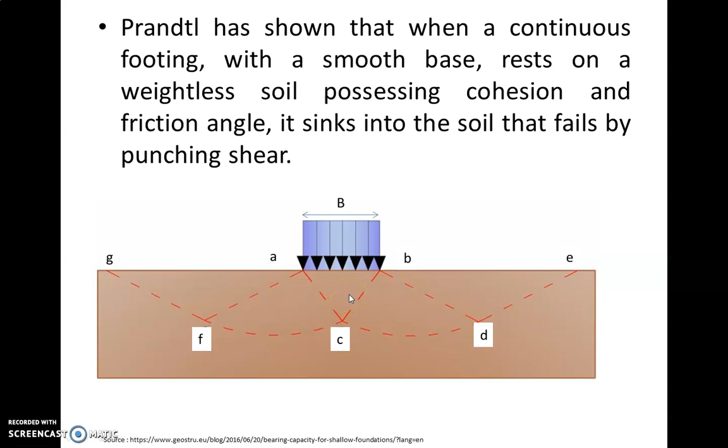Prandtl in 1920 proposed his theory of bearing capacity based on his study of penetration or punching of long hard metal punches into a softer material. He observed that the hard metal punched into the softer material, and the same theory he used in order to define the theory of bearing capacity.

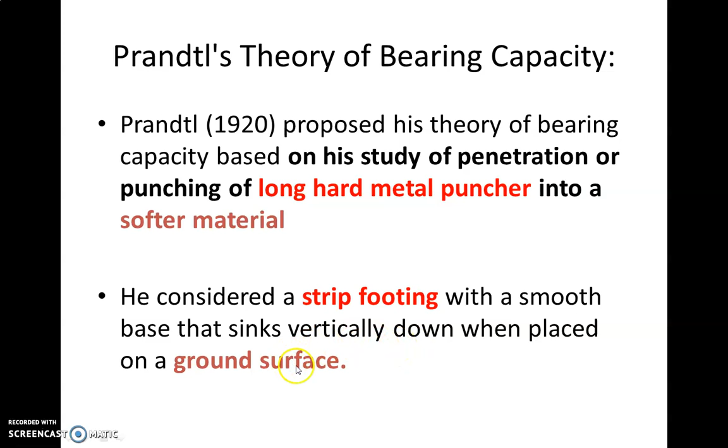So here the hard metal punch is referred to as stiff footing and the softer material is referred to as ground surface. So when the stiff footing with the smooth base rests on the soil, it would sink vertically in downward direction when placed on ground surface.

There are certain assumptions made by Prandtl. Those are: the material is softer, homogeneous and isotropic. That means the soil is referred to as soft and it is homogeneous as well as isotropic. The material is weightless, that means its weight is equal to 0. As weight is equal to 0, unit weight gamma will also be equal to 0, as gamma is equal to weight by volume. So if W is equal to 0, gamma will also be equal to 0.

But the soil is referred to as the C-phi soil, that means it would have cohesion and friction. The problem is two-dimensional, that means two directions would be considered, maybe X and Y directions. The base of the punch is smooth, that is the base of the footing is considered to be smooth, not rough.

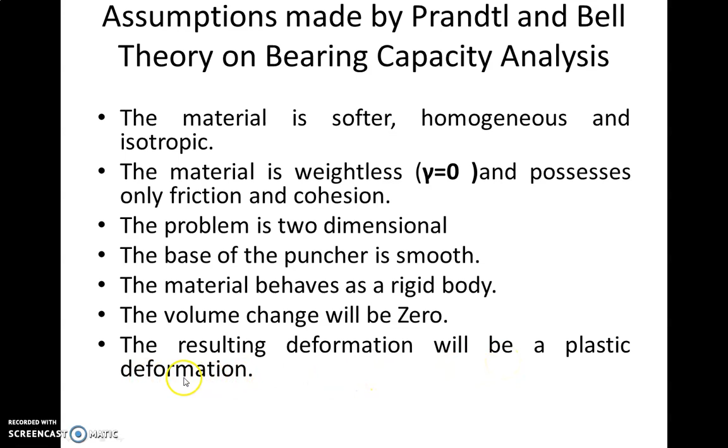The material behaves as a rigid body, that means the soil is referred to as rigid, and the volume change will be 0. The resulting deformation which would occur due to punching of the footing into the soil will be a plastic deformation. That means it will be an irreversible deformation. The uniform vertical load is applied to an infinitely long strip of width B. So here in the figure we can see a stiff footing which is having width B, but it is infinitely long.

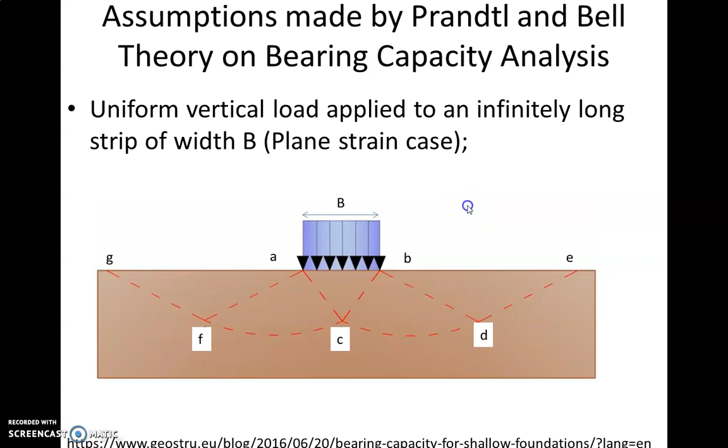Now we will find out what is the difference between elastic and plastic equilibrium. We know that when the rubber band is stretched and when the force is removed, it will come back to its original form. But whereas in plastic equilibrium, the object will not return to its original form, it will undergo permanent change when it is stressed. An example of plastic equilibrium is landmass filling.

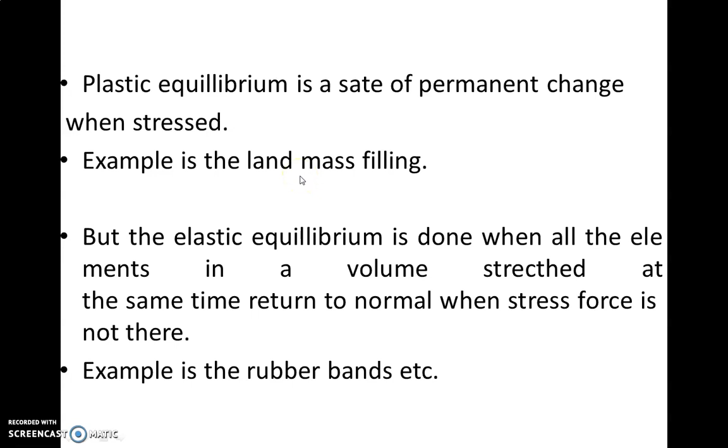The mechanisms of failure of soil under plastic equilibrium are: the failure occurs along definite slip surfaces, symmetrical with respect to the center line of the punch or footing in case of soil for symmetrical vertical loading. So here we can see that there is the load which is acting in vertical direction from this stiff footing, and due to this loading, there will be slip surfaces which can be seen over here. And these slip surfaces are symmetrical with respect to the center line of the footing. And those slip surfaces can be seen here, that is CFG and CDE.

Under ultimate load, that is the Q ultimate, which acts on the footing of width B, we can see a triangular wedge of the soil which is formed and is enclosed between points A, B, C. So A, B, C is the triangular wedge of the soil which will be formed below the footing, and this will be pushed down as a rigid body, and the stresses on ABC will be usually in active stage.

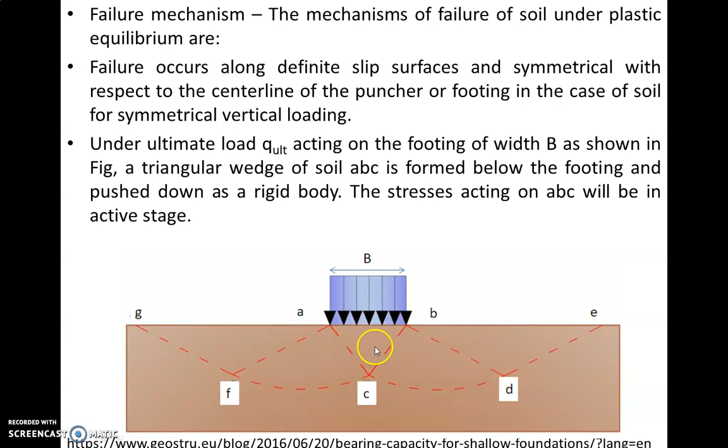With further downward movement of the wedge, that is ABC, the soil mass on the left hand side and also on the right hand side will be pushed in outward and upward direction. The failure takes place along the slip surfaces shown by the points B, C, D, E, and on the left hand side it is A, C, F, G. These surfaces comprise of triangular wedges, that is A, F, G and B, D, E.

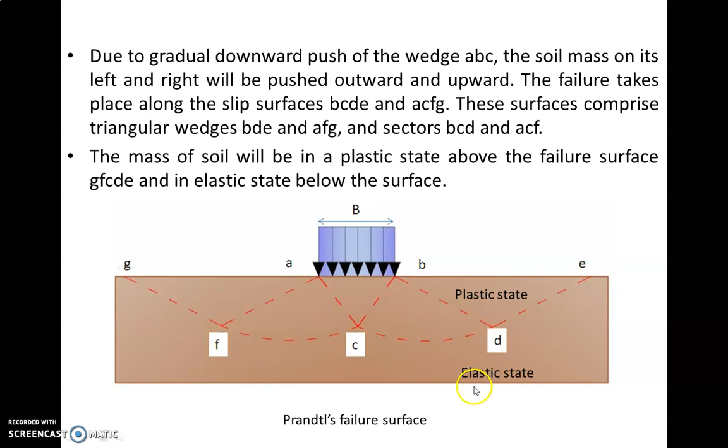So two triangular wedges are formed on the left and right side, and also there will be sectors which will be formed and are shown by the points A, C, F and B, C, D. So these two are the sectors. The mass of soil will be in plastic state above the failure surface, and soil below will be in elastic state.

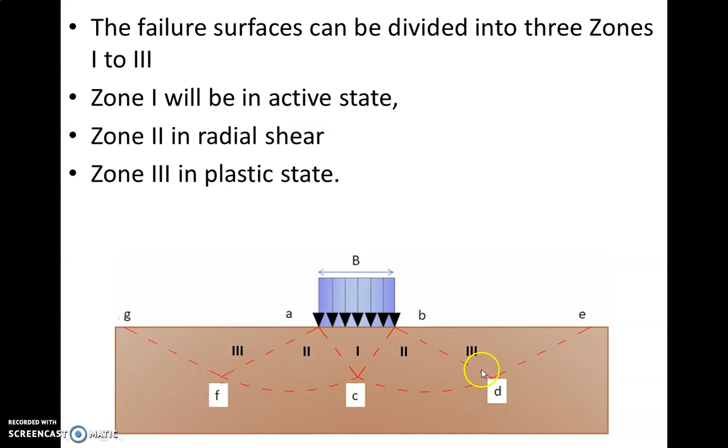The failure surfaces can be divided into three zones, that is 1, 2 and 3. So this zone is zone number 1, which is in active state, enclosed between the points A, B, C, which is a triangular wedge. Zone 2, which is enclosed between points A, C, F and B, C, D, is in radial shear, whereas zone 3, which is enclosed between points A, F, G and B, D, E, will be in plastic state.

The lower boundaries of zone 2 are parts of logarithmic spirals with their poles coinciding with the corresponding edge of the footing, that is A and B. So here we can see that the lower boundary of the zone 2, that is CF and CD, are logarithmic spirals with their poles coinciding with the corresponding edges of the footing, that is A and B.

The straight lines DE and FG are tangential to spirals at points D and F, and these straight lines meet the horizontal surface at angle equal to alpha on both the sides. So here we can see angle alpha on left portion, and alpha is the angle made by the line DE with respect to the horizontal surface, and this alpha is equal to 45 degrees minus phi by 2, where phi is the angle of internal friction of the soil.

By considering the shape of failure surface of zone 2 as a logarithmic spiral, which we saw here in the diagram, that is CD and CF considered to be logarithmic spiral, Prandtl gave the following equation in order to find ultimate bearing capacity based on theory of plasticity. So for c-phi soil, Q ultimate is given by equation C into Nc, where C is the cohesion value, and Nc can be found out using equation 1 divided by tan phi into tan square (45 plus phi by 2) into e raised to pi tan phi, minus 1.

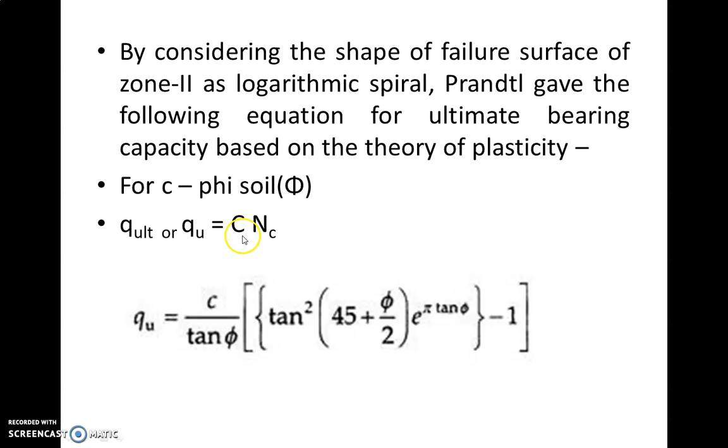So if we know the value of angle of internal friction phi, we will be able to find Nc. So once we find Nc and if we know the value of C, we will be able to get the ultimate bearing capacity of the soil. So here, in order to find bearing capacity using Prandtl equation, we need the value of C and phi.

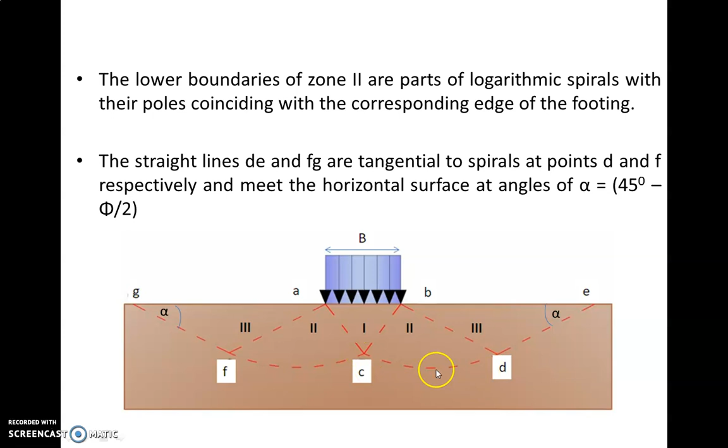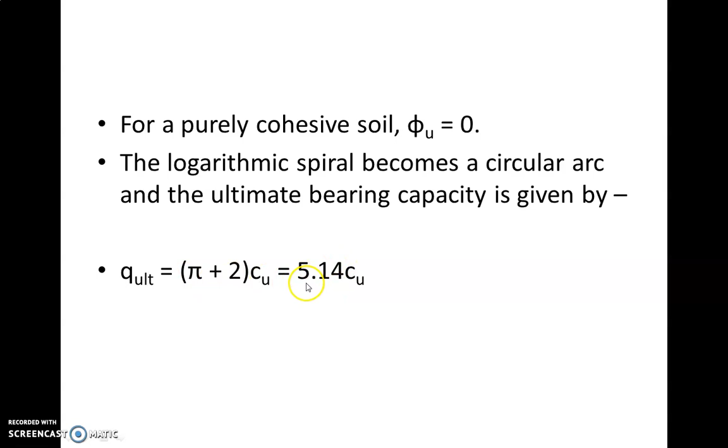For a purely cohesive soil where phi is equal to 0, the logarithmic spiral becomes a circular arc, and the ultimate bearing capacity is given as Q ultimate equal to (pi plus 2) into Cu, where Cu is undrained cohesion, which can be written as equal to 5.14 into Cu. So here, when phi becomes equal to 0, the logarithmic spiral which we saw here in the diagram, that is CD and CF, becomes the circular arc. So for circular arc, the equation is modified as Q ultimate equal to (pi plus 2) into Cu, and hence we will be able to calculate the value of ultimate bearing capacity using equation 5.14 into Cu.

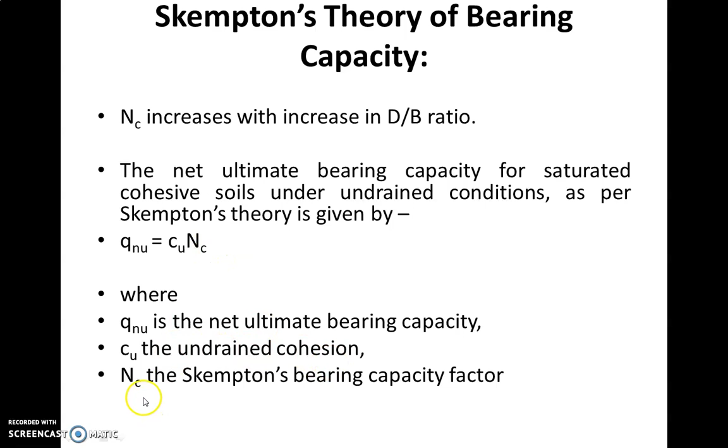Now we will study about Skempton's theory of bearing capacity. He observed that the value of Nc increases with the increase in depth to width ratio of the footing. The net ultimate bearing capacity for saturated cohesive soil under undrained condition as per Skempton's theory can be given as QNU equal to Cu into Nc, where QNU is the net ultimate bearing capacity, Cu is undrained cohesion, Nc is the Skempton's bearing capacity factor.

Now here various equations are shown in order to find Nc for different shape of the footing. For strip footing, Nc is equal to 5 into (1 plus 0.2 into d by b), where d is depth of foundation and b is width of the foundation. If the footing is of square or circular shape, then Nc is equal to 6 into (1 plus 0.2 into d by b). For rectangular footing, we have got two equations based on d by b ratio.

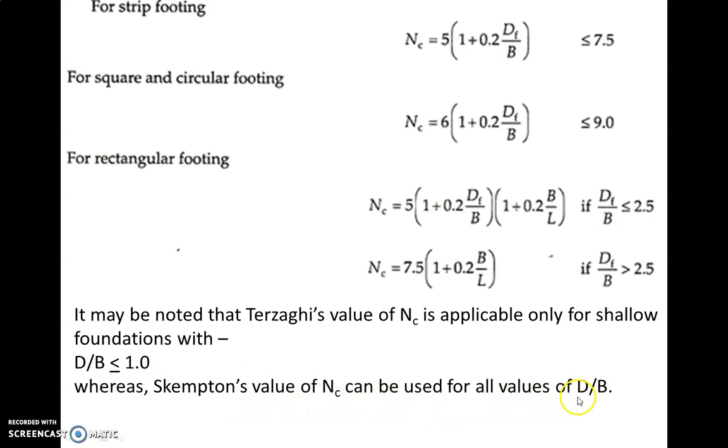If d by b ratio is less than or equal to 2.5, Nc is equal to 5 into (1 plus 0.2 into d by b) multiplied by (1 plus 0.2 into b by L). Whereas if d by b is greater than 2.5, Nc is equal to 7.5 into (1 plus 0.2 into b by L). Terzaghi's value of Nc is applicable only for shallow foundation when the d by b ratio is less than or equal to 1. But the Skempton value of Nc can be used for all the values of d by b.